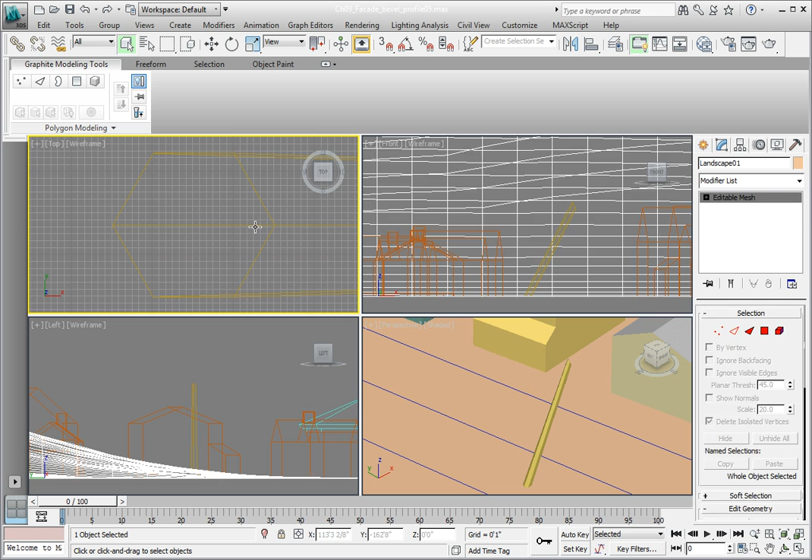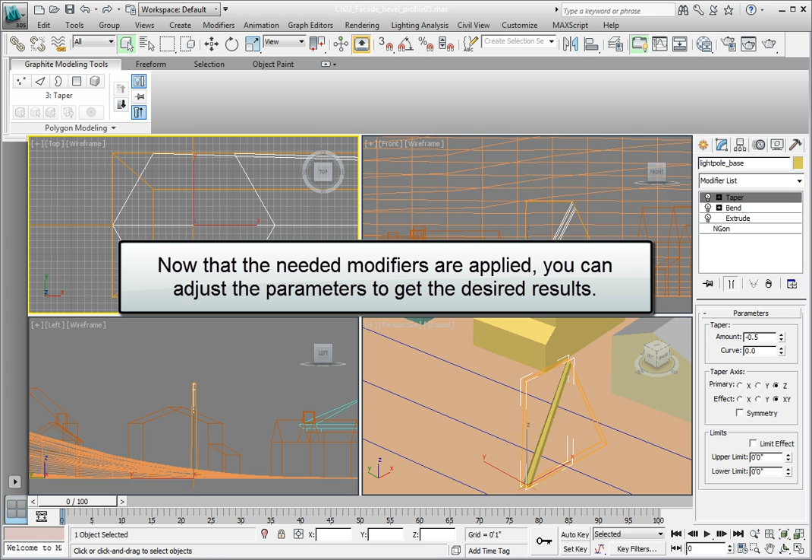Continue from the previous lesson or open the file Chapter 3 Facade Bevel Profile 05.max. Go ahead and select the object Light Pole Base if it's not already selected. Remember, we've added several modifiers, but we didn't get the object we were really looking for. Now we need to use the flexibility built into this stack view to navigate the modifier stack and make changes to the various parameters that will give us what we're looking for.

Let's begin by editing the extrude modifier. This will allow us to edit the extrude modifier parameters in the modifier stack. Go ahead and click on the extrude modifier. When we created the pole, by default it was created with only one segment. That means that there was only one segment along the entire 40 feet of this pole. Therefore, when we put the bend modifier on it, it actually didn't bend, it just sort of laid over.

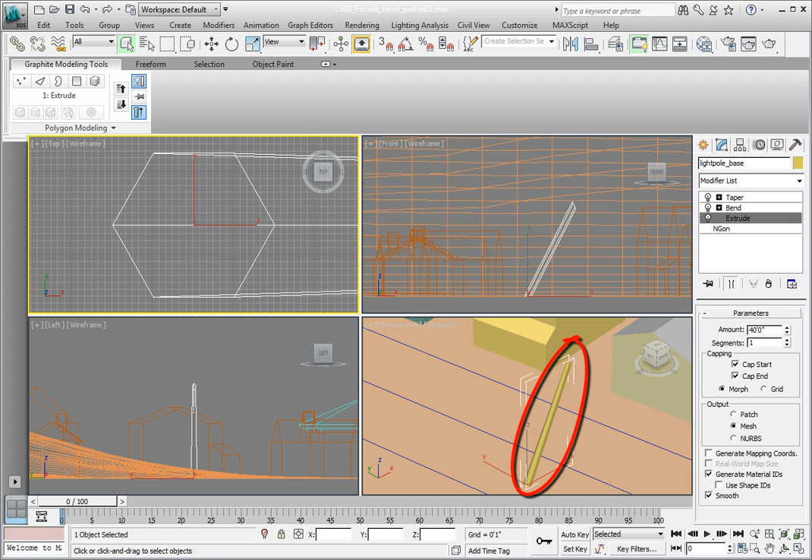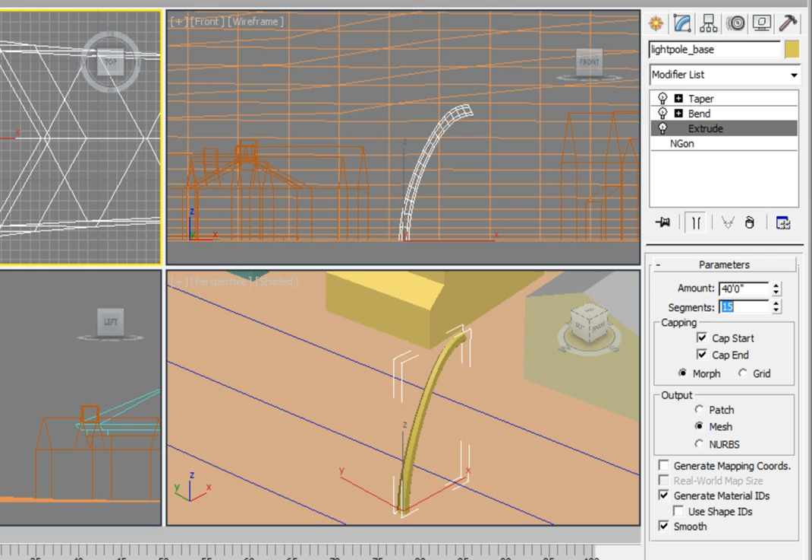In order to fix this, we need to increase the number of segments. 15 to 20 should be enough to give us a reasonably smooth curve. For efficiency's sake, let's keep that value at 15. Highlight the number in the segments, type in 15, and then press Enter. Now that gives us enough segments to show the bend and taper effect. But as you notice, the pole is very oddly distorted.

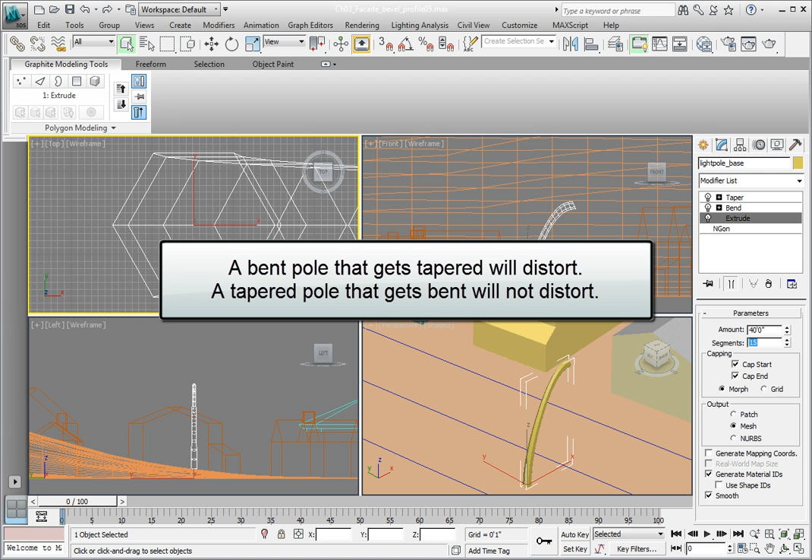Think about what we've done. We've extruded the shape to make a pole. Now we've added segments that allow us to bend it. Then we bent the pole, and then we tapered it. The problem is a bent pole that gets tapered will distort. The problem in the modifier stack is that the taper and the bend modifiers are in the wrong order.

Let's correct that by selecting our bend modifier, clicking and dragging it above the taper modifier, and then releasing the mouse button. Now we've extruded the object, then tapered it, then bent it. In this order, we not only get a more logical progression of modifiers, we also get something closer to what we want for our final object.

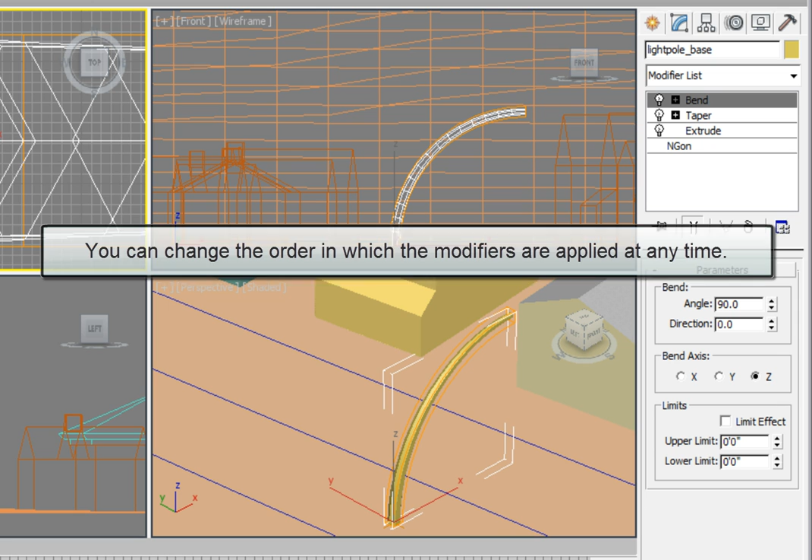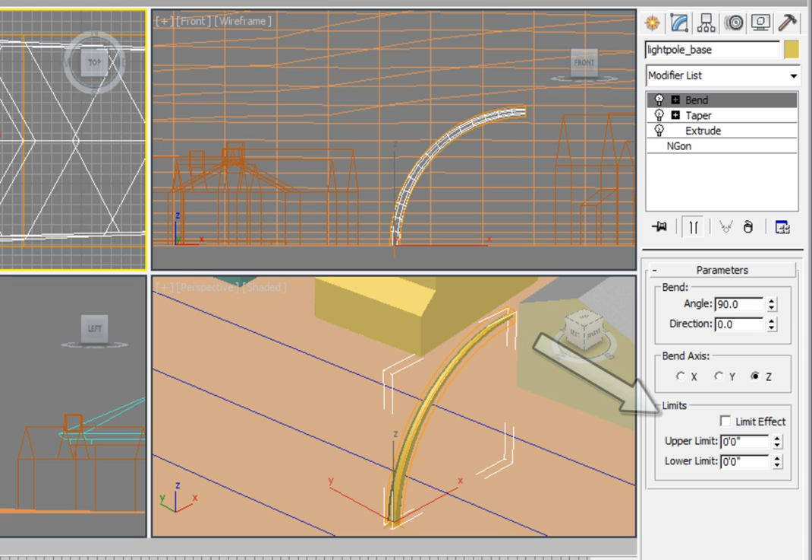The last problem is that the bend isn't quite right. We're going to use a feature called limits. We want to be able to limit the effect of the bend to within a certain distance of the pivot point of the object, which becomes the center of the bend. With the bend modifier selected, in the parameters rollout limits area, click the limit effect checkbox to turn on the bend limit options. Look at what happens to our pole. It just lays down flat.

To fix this, in the upper limit field, type in 10 and press the Enter key. This tells 3ds Max to only bend up 10 feet. Now this makes an interesting change, but it's still not what we're looking for. I don't think this light pole would work particularly well on any standard city street.

Most objects we've worked with so far have had a sub-object level, and the modifiers are no different. In the bend modifier, expand the list by clicking on the plus sign and select the center sub-object level. Then right mouse click in the front viewport, and we're going to move where the bend occurs in the pole. Make sure you have the Select and Move tool active from the main toolbar.

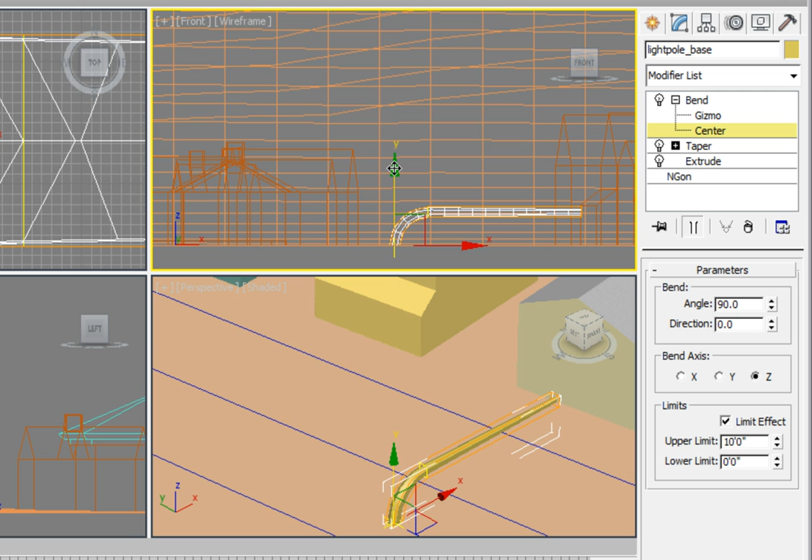Highlight the Y-axis on the transform gizmo in order to limit our movement to only the Y direction. Now click and move the Bend Center gizmo up in the viewport so that your pole looks something like this. We've changed where the bend starts and how long the bend lasts in order to get our light pole to look the way we want it.

Something that's very important is that you don't need to remember all of the tools. However, it is important that you take some time and play with the features. You'll begin to understand as you work with the tools that you have an extraordinary amount of flexibility.

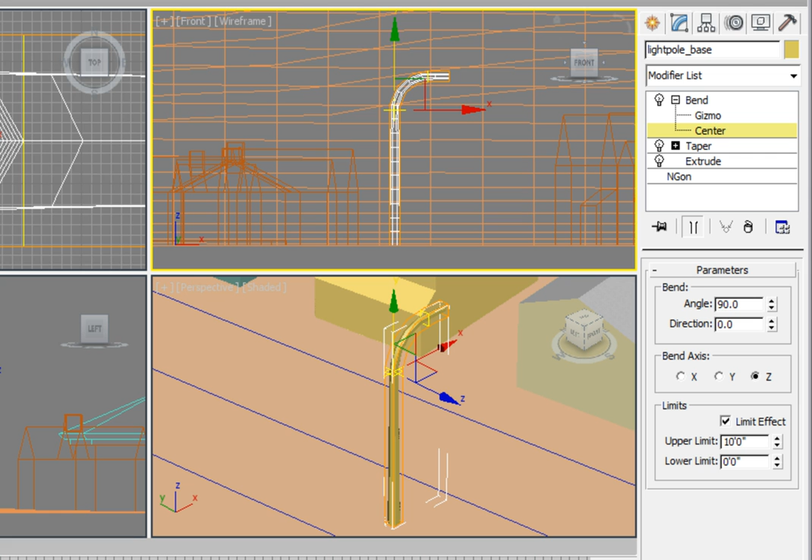Anytime you work with sub-object level, it's almost always wise to close or exit the sub-object level and return to the top level. In this case, click on the Bend modifier top level to highlight it and exit sub-object mode. Save the file by pressing Ctrl S. We now have a lamppost that is bent and looks the way we want it to look.